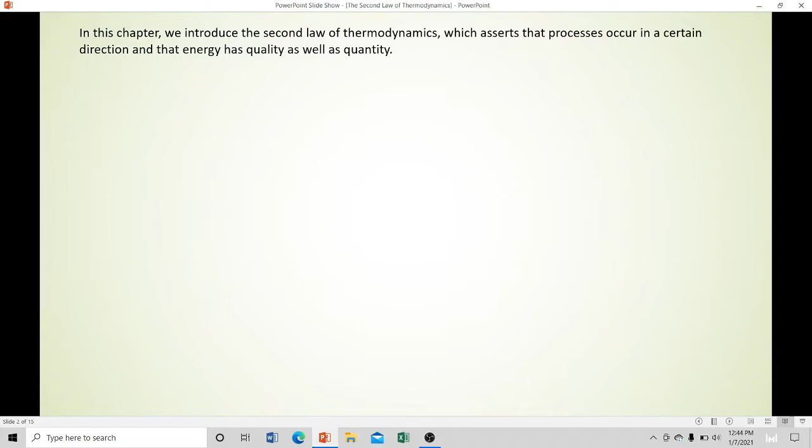As for the degree of degradation, what do you mean by degradation of energy? The more cycles or processes occur, we can say that a process is irreversible, which means that as a substance undergoes a process, its energy degrades or decreases in its ability to convert into work.

So that work, in a sense, allows the water to gain heat. The more work is created by the paddle, the more the water heats up or gains heat. Why is that? Because in terms of intermolecular activity of the substance or water, like a centrifuge or kinetic molecular motion, it gains heat.

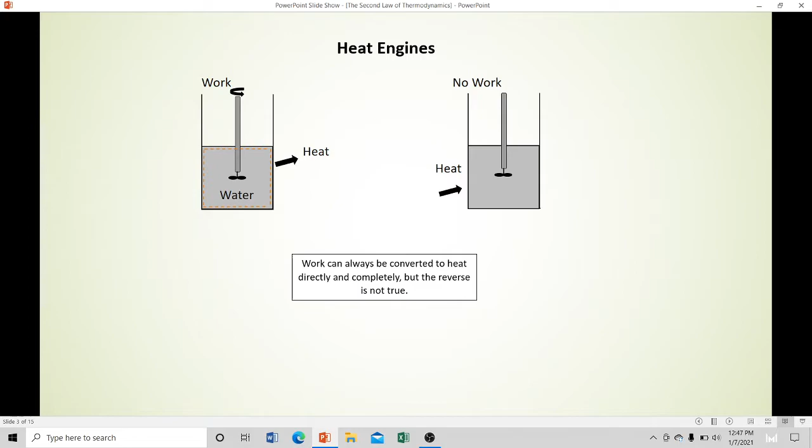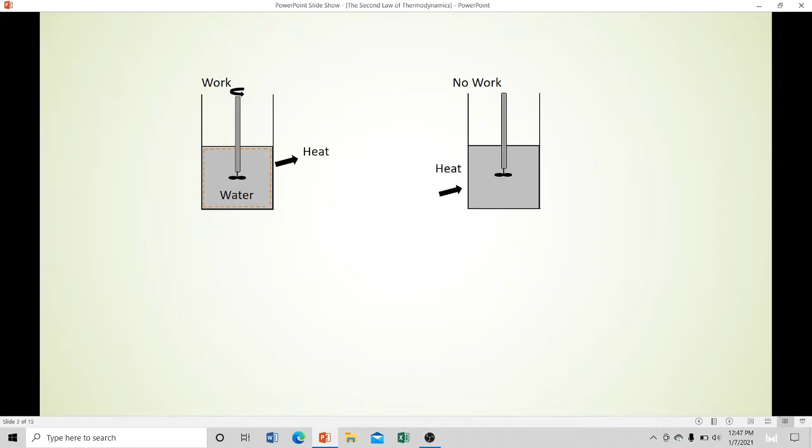So work can always be converted to heat directly and completely, but the reverse is not true. From this previous figure and other observations, we can conclude that work can be converted to heat directly and completely, but converting heat to work requires the use of some special device, and these devices are called heat engines.

So this is a typical illustration or diagram for the heat engine, for the process of the heat engine. This diagram consists of a heat source, which is where your heat originates, and then your heat engine, which will produce work or net work, and your heat sink.

So in the second law of thermodynamics, as I said, what we focus on here is the quality of the energy. This means the heat Q in coming from the heat source is received by the heat engine and it creates work from it. But not all of that Q in can be converted into work. So there is wasted energy, which means this is the heat out or your heat rejected.

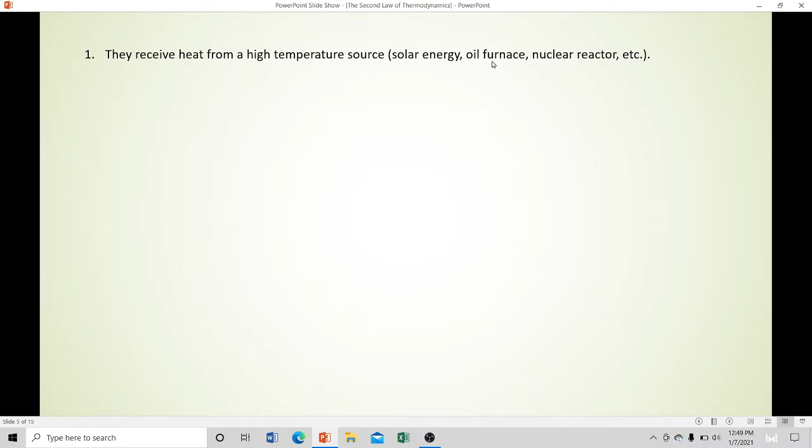So heat engines differ considerably from one another, but all can be characterized by the following: first, they receive heat from a high temperature source or heat source, which should be high temp, such as solar energy, oil furnace, nuclear reactor, etc.

Second, they convert part of this heat to work, usually in the form of a rotating shaft. This part is your heat engine. Third, they reject the remaining waste heat to a low temperature sink, such as the atmosphere, rivers, etc.

And fourth, they operate on a cycle. So what do you mean by a cycle? A cycle is a thermodynamic cycle that occurs when the working fluid of a system experiences a number of processes that eventually return the fluid to its initial state.

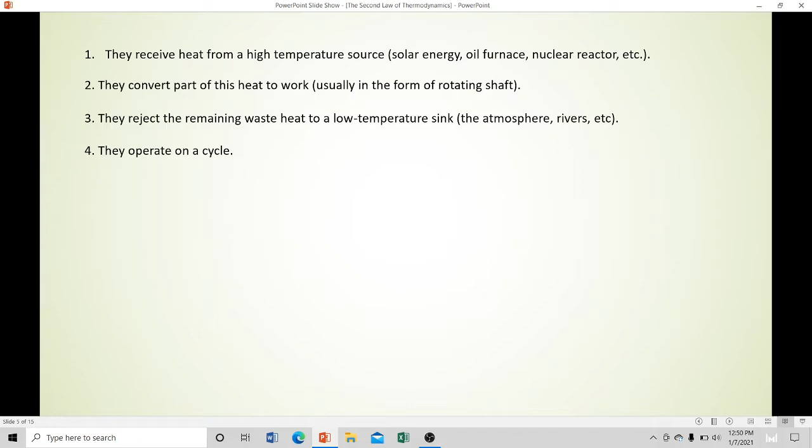A thermodynamic cycle is a series of thermodynamic processes which returns a system to its initial state. So the work of a cycle, if we create a mathematical form, work is equal to the summation of heat, where work is equivalent to Q added minus Q rejected.

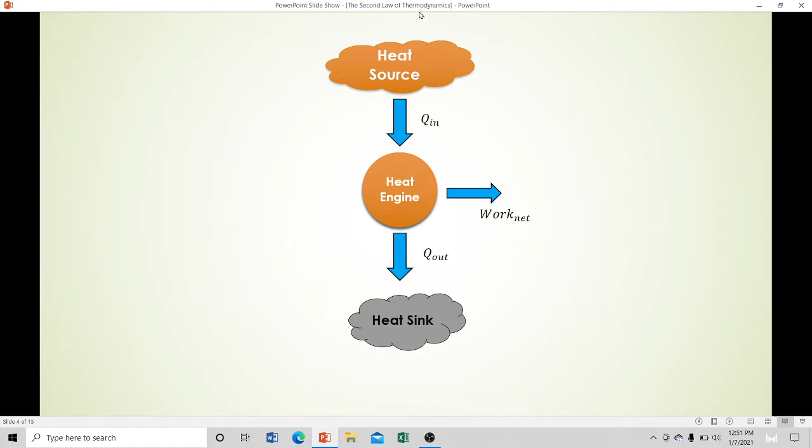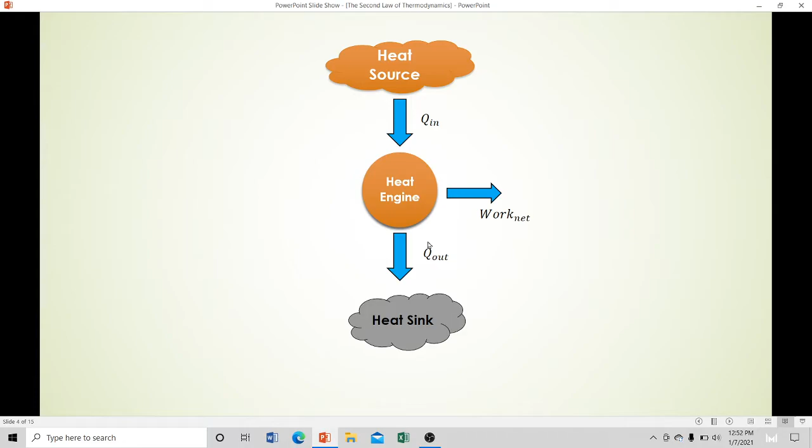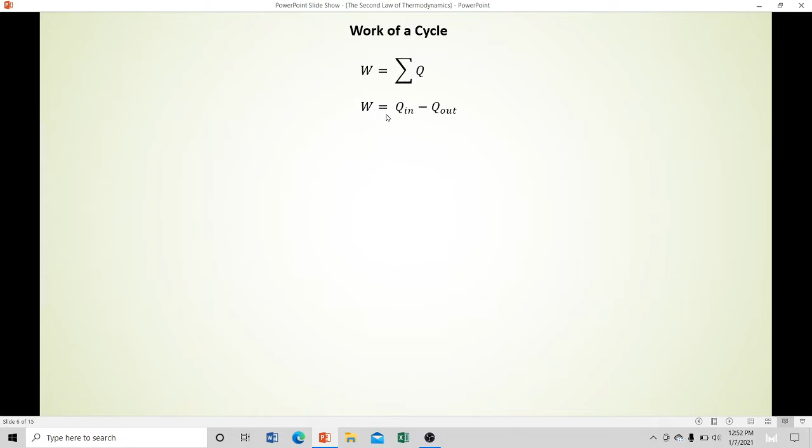As we observe this diagram, it's important that we understand this heat engine diagram in order to analyze the cycles. If we consider the heat engine as a system, heat going in is a positive sign, and heat going out is a negative sign. So if you sum up Q, this is what happens in your equation: work is equal to Q in minus Q out.

For the thermal efficiency of a heat engine, the desired output is the net work output, and the required input is the amount of heat supplied to the working fluid. So the thermal efficiency of a heat engine can be expressed as thermal efficiency equals net work output over the total heat input.

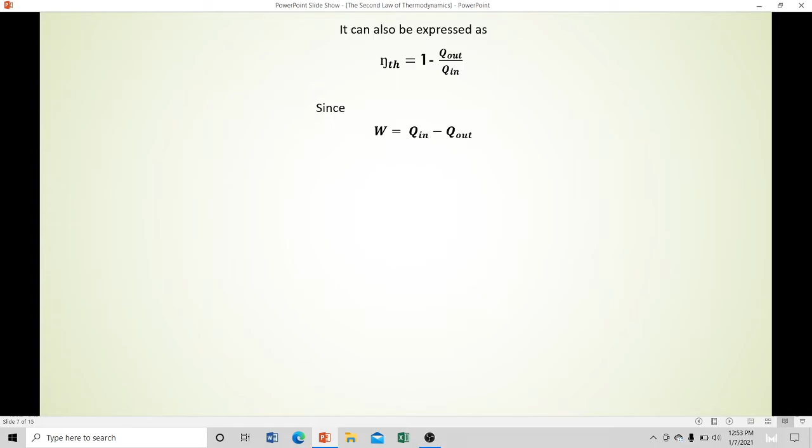As I said, in the second law of thermodynamics, what we focus on is the quality. So for a heat engine, what we determine is its performance, expressed in terms of percentage. Efficiency is equal to net work over Q in. It can also be expressed as efficiency equals 1 minus Q out over Q in, since work is equal to Q in minus Q out.

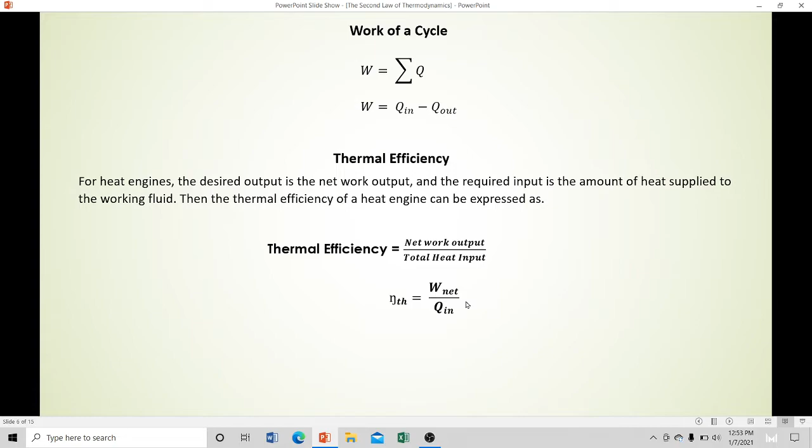So we have work equals Q in minus Q out, and so the equation becomes 1 minus Q out over Q in. We just substitute the work there.

Let us move to a sample problem. Sample problem number 1: Heat is transferred to a heat engine from a furnace at a rate of 80 megawatts. If the rate of waste heat rejection to a nearby river is 50 megawatts, determine the net power output and the thermal efficiency for this heat engine.

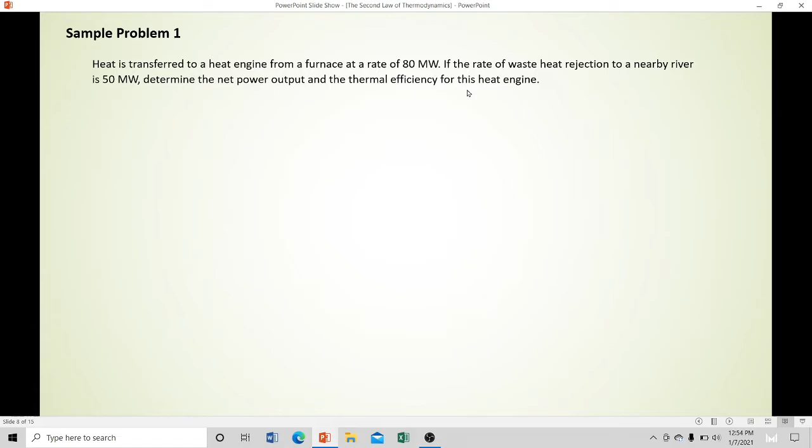In order to analyze a cycle, we should make a diagram for this problem. So we have the heat source, this furnace, which is what we call the heat source. And for our device, it's the heat engine, and then for our heat sink, which is the river.

For the furnace, this is the source of heat, so Q in is equivalent to 80 megawatts, received by the heat engine. But there is waste heat of 50 megawatts. So what is the work here for the heat engine?

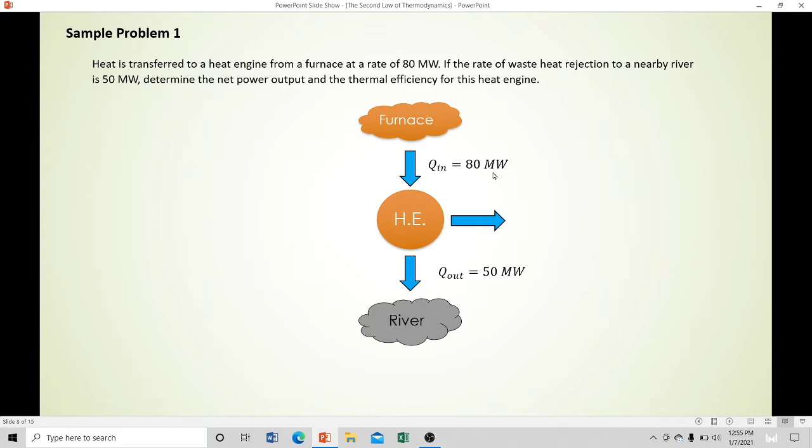So 80 minus 50. For the solution, we have the net power output of this heat engine. Power means the rate of work, so net work is equal to QH minus QL, heat added minus heat rejected. So net work is equivalent to 80 minus 50, which equals 30 megawatts.

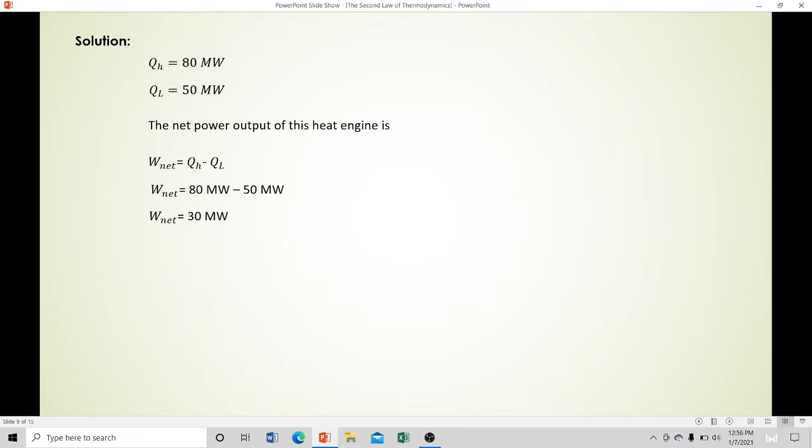Then the thermal efficiency is easily determined to be: efficiency equals net work over Q in. So thermal efficiency equals 30 over 80. So the thermal efficiency is equal to 37.5%.

Adding some information, heat engines reject some heat to a lower temperature reservoir in order to complete a cycle. This limitation on the thermal efficiency of heat engines forms the basis of the Kelvin-Planck statement of the second law of thermodynamics. We'll discuss later what the Kelvin-Planck statement says.

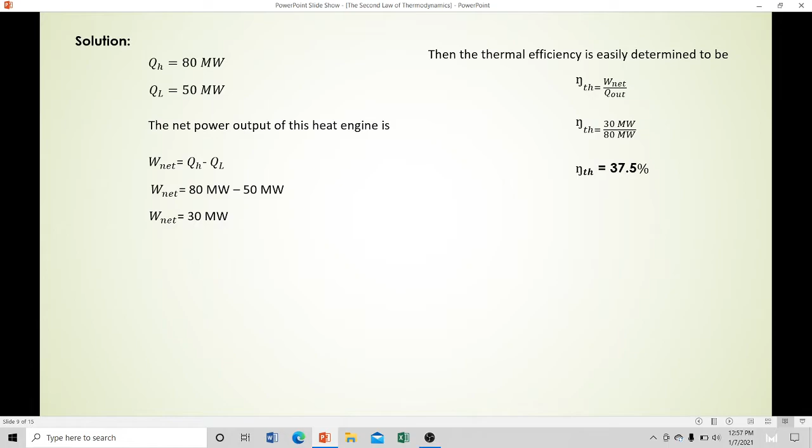The second law of thermodynamics, Kelvin-Planck statement: it is impossible for any device that operates on a cycle to receive heat from a single reservoir and produce a net amount of work.

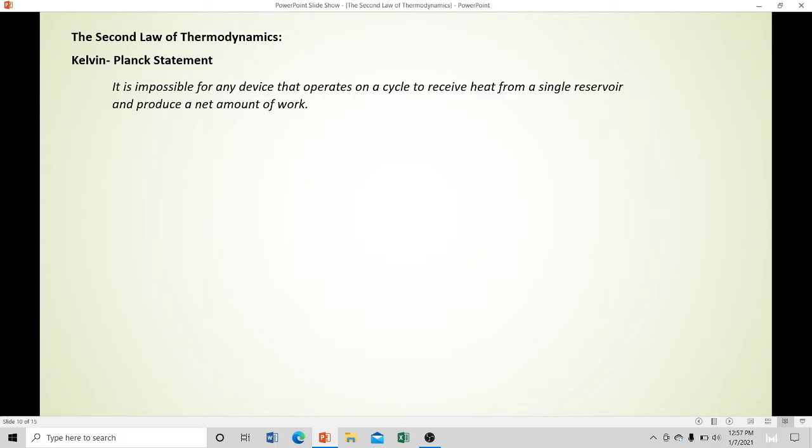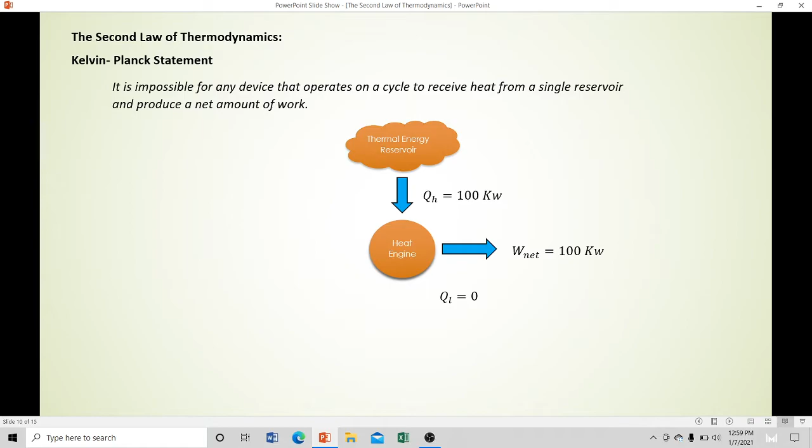For the perpetual motion machine, we have repeatedly stated that a process cannot take place unless it satisfies both the first and second laws of thermodynamics. Any device that violates either law is called a perpetual motion machine. If a perfect cycle like this existed, it would be a perpetual motion machine—a perfect machine.

A device that violates the first law of thermodynamics by creating energy is called a perpetual motion machine of the first kind. A device that violates the second law is called a perpetual motion machine of the second kind. This kind of machine has not yet existed, but this has not stopped inventors from trying to create new ones, doing research on how to create such a perfect machine.

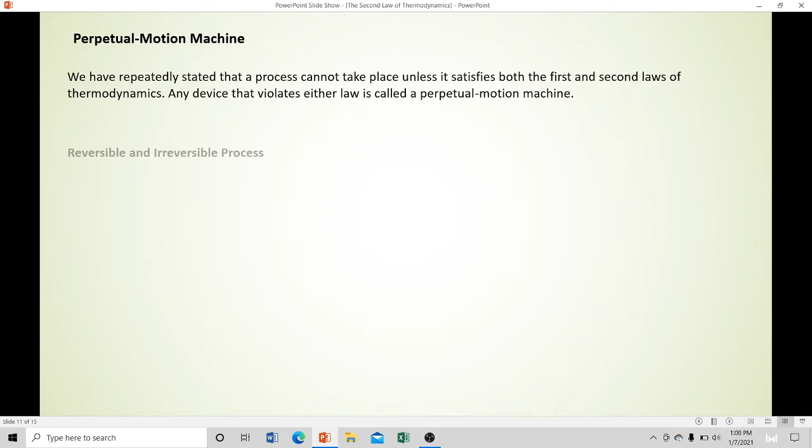Reversible and irreversible processes. A reversible process is defined as a process that can be reversed without leaving any trace on the surroundings. That is, both the system and the surroundings are returned to their initial states at the end of the reverse process. This is possible only if the net heat and net work exchange between the system and the surroundings is zero for the combined original and reverse process.

Just like the steam power plant, its cycle is in terms of reversible process—it returns, there's a cycle, in terms of a reversible process.

Processes that are not reversible are called irreversible processes. For example, take a cup of tea placed on the table.

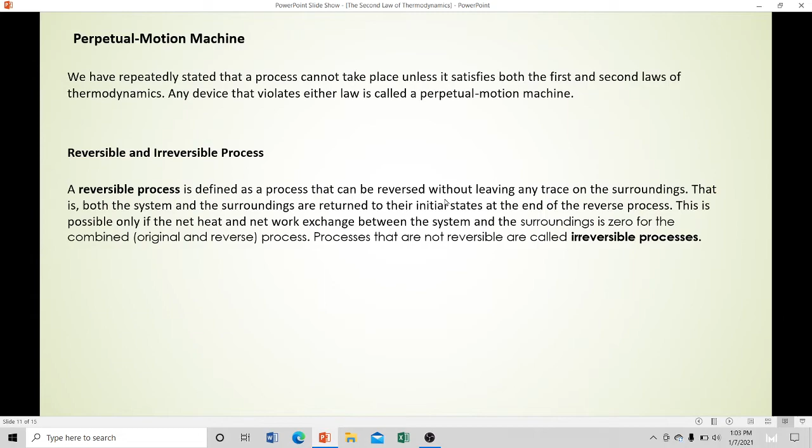We can see that the cup of tea is exposed to the atmosphere or environment, which means there is transfer of heat. From your tea or coffee, the heat transfers to the surroundings, which means their temperatures become equal, reaching equilibrium. At that time, the coffee cannot return to its original hot state because it has already reached equilibrium between the environment and the coffee.

The Carnot cycle is the most efficient cycle conceivable. There are other ideal cycles as efficient as the Carnot cycle, but none more so. Such a perfect cycle forms a standard of comparison for actual engines and actual cycles, and also for other less efficient ideal cycles. The Carnot cycle is only an idealistic cycle.

This is what an actual engine should attempt to attain. Unless the process takes infinitesimal or very long time, friction between substances cannot be avoided. If there is no kinetic loss or kinetic energy loss that happens, then your cycle becomes a perfect cycle—that's the Carnot cycle.

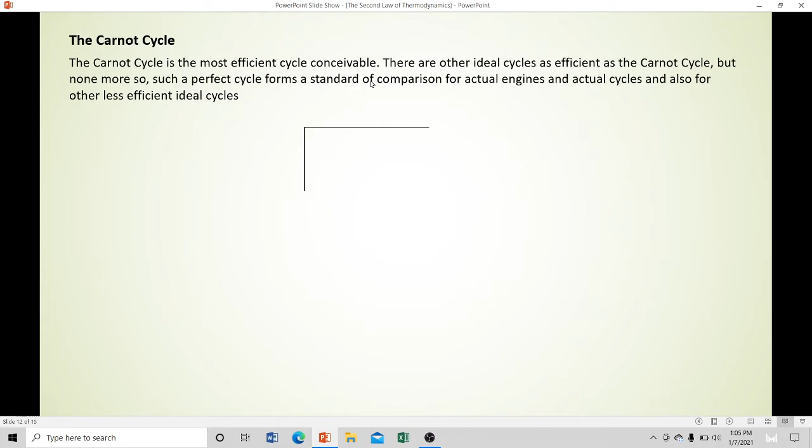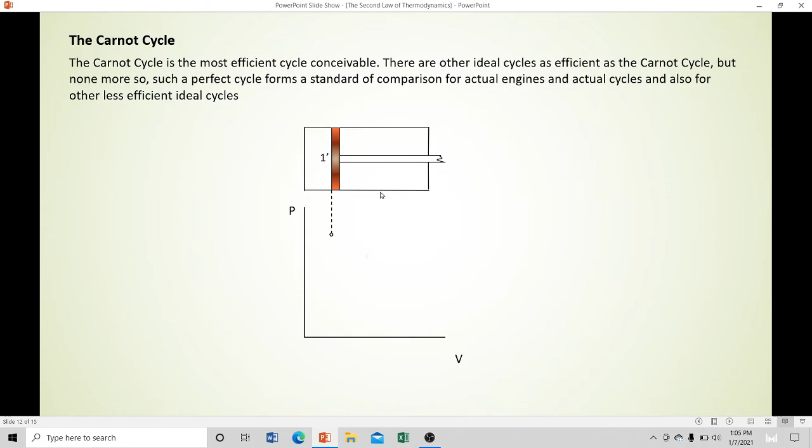Let us look at this figure. Assume that inside this vessel there are gases or some substance placed under this cylinder head. From this point 1, if you move this, from process 1 to 2 this is at constant temperature.

From process 2 to 3, you expand it—if an expansion happens here, it's expanded from process 2 to 3, which means this is an isentropic process, so entropy equals constant.

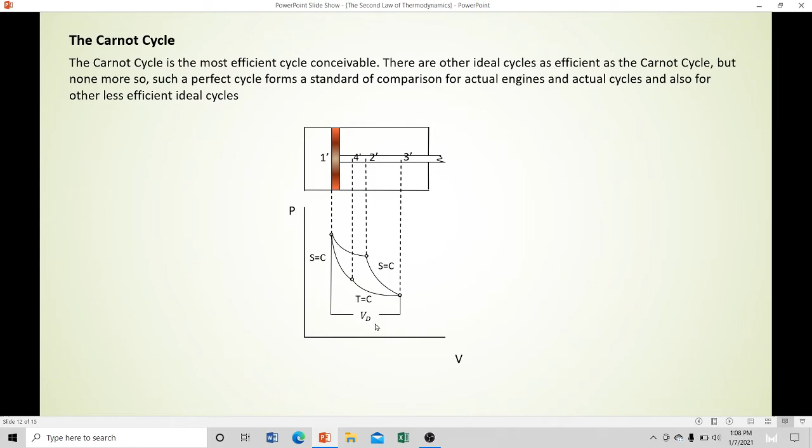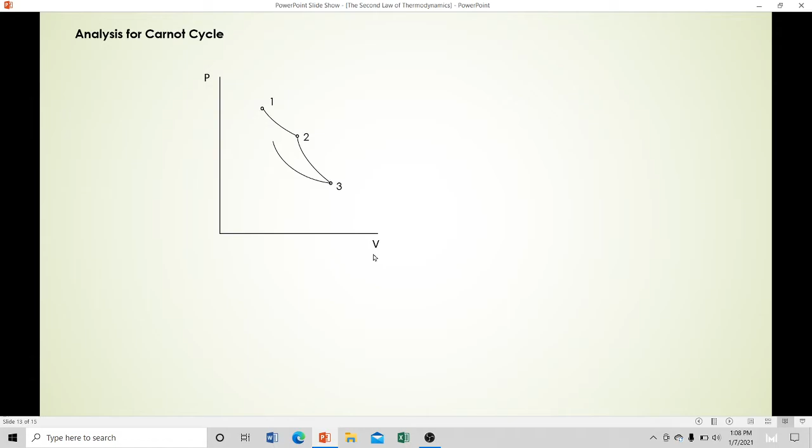For the analysis of the Carnot cycle, we have this PV diagram. We have processes 1 to 2, 2 to 3, 3 to 4, and 4 to 1.

So this is an alternate solution for your work. The work can be expressed in terms of heat, Qin minus Qout, but it can also be in terms of summation of work. So from process 1 to 2, this is constant temperature.

For the constant temperature, we have P1 V1 ln(V2 over V1). So from process 2 to 3, for isentropic process, we have P3V3 minus P2V2 over 1 minus k.

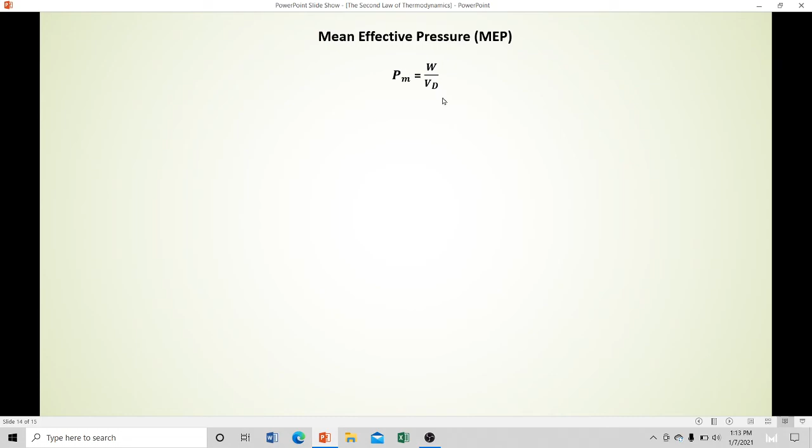So for the mean effective pressure, or MEP, we have PM is equal to work over the volume displacement. Volume displacement, or displacement volume, is the volume swept by the piston in one stroke. So the mean effective pressure is the average constant pressure that, acting through one stroke, will do the same net work on the piston as a single cycle.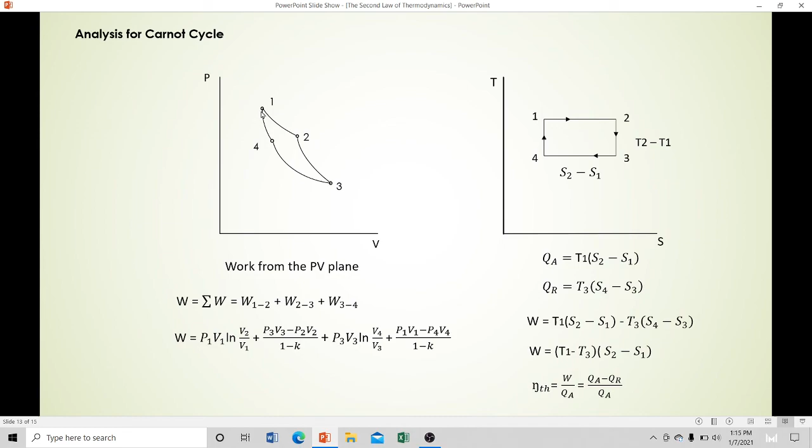So for the isothermal expansion ratio, we have V2 over V1. That's because point 1 to 2 is your constant temperature process, so isothermal expansion ratio is equivalent to V2 over V1.

For the isentropic expansion ratio, we have V3 over V2, since your 2 to 3 process is isentropic process, so V3 over V2 is the volume we need. So overall expansion ratio is equivalent to V3 over V1.

So for the compression ratio, it is equals to the volume at the beginning of compression over the volume at the end of compression. The volume at the beginning of compression is your point 3, and your volume at the end of compression is your point 1.

So isothermal compression ratio, we have V3 over V4, since from 3 to 4 the process is isothermal process, so the volume we use is from point 3 to 4, V3 over V4.